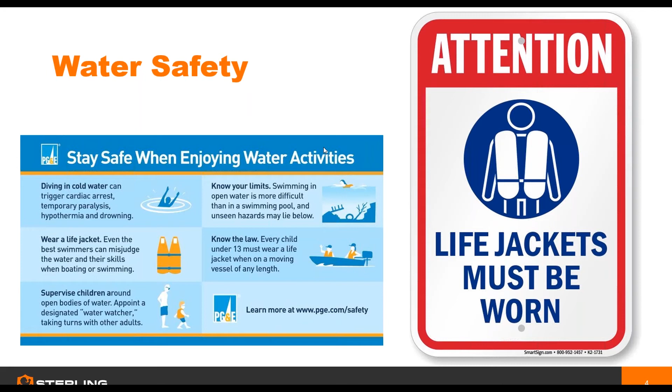So I've put a couple slides up here just to remind us that we're coming into that time of year—whether we have kids or grandkids, take water safety seriously. It can cause tragic events quickly that can change our entire life. I just want to put that reminder up before we get into the details of specifically working near water.

To talk about working on or near water, the first area of regulations and rules we need to consider is we should always have a life-saving skiff. With that, we should have a 30-inch life ring and 50 feet of suitable line. The only exception to this is if we can walk into the water and pull someone to safety without that need. Ring buoys also need 90 feet of line, with 200 feet spacing between them.

We're going to look at a lot of different scenarios today where we're working in moving water or standing water, but these are all things we need to consider. First aid or CPR is also something we need to have, combined with working with the buddy system—we should always have someone else with us when we're working around water—and then proper personal flotation devices.

When we talk specifically about engineered or non-engineered temporary water crossings, we should always inspect them before crossing. It's not only while we're building them, but we also need to consider the risks before we cross them and take ownership in monitoring and inspecting those crossings.

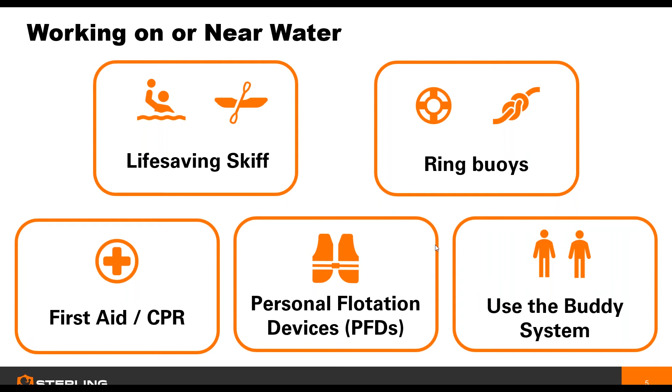So looking at the different scenarios we'll consider as we talk about bridging today, there's a lot of unique attributes to these different areas. Naturally, when we think of waterways, my mind goes to moving water, open water, creeks, rivers. But it actually spans a much wider range of things.

So, ditches—really a rapid grade change, or just an entry ditch—typically dry, with solid soil bearing. Then we get into wetlands. This is typically standing water or constant water. Naturally, you're going to have a different soil bearing, which brings in a lot of additional environmental considerations.

Underground utilities or infrastructure - we're showing a pipeline marker here, but that goes into ductwork, drain tile. Really what we're trying to avoid here is any type of compaction or compression of the soil that could damage those resources.

The last area is elevated obstructions. There's times out in the field where we're going to come up against an area that we just can't remove an obstruction, or it's not cost effective to do so. The example we have here is railroad tracks, and just making that smooth transition over, protecting the rails or whatever asset is crossing, by a type of bridging solution.

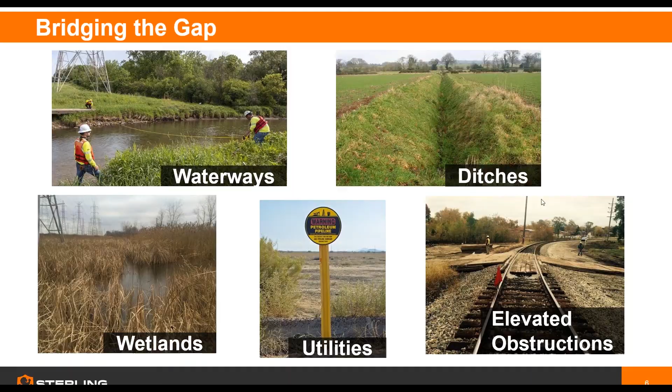What I really want to stress before we get into the different solutions is it's all about risk management. There's many risks associated with poor planning or lack of knowledge when we talk about selecting and constructing the right crossing. We're talking environmental, regulatory repercussions, potential loss of property, or even death. We really have to ask ourselves two questions right away: what's the potential impact of my decisions and actions, and what's the severity of the outcome possible?

There's a picture here of just an example of crossings - they are a risky part of the construction business in the field. There's a lot of things to consider, and there's just too many variables that can make things go wrong. This picture is a timber crossing that was the result of a flood event that came in quickly and unexpected. These timbers being pushed down the right-of-way naturally are going to cause potential backing up of water and many different issues that compound quickly. So we need to make sure that we're managing the risk and planning for it on the front end as we build our crossings.

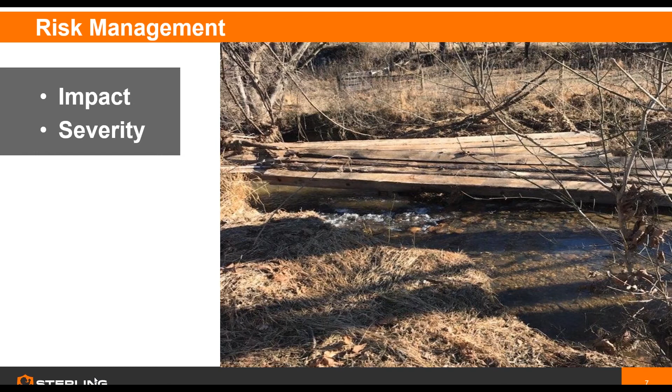Naturally, near and dear to my heart is field ingenuity. I started in the field and have come up that way, and I think it's important that we appreciate what the field can do. I think there's a lot of things that we do are more of an art than a science, but anytime that we can take that information and we can get ahead of it, we can plan for it, we can mitigate more of the risk.

So construction is naturally a fine balance between schedule, cost, and mitigating risk. All those things have to work together. So it's critical when we're setting up the job that we're preparing our guys in the field with clear direction and plans, clarity of the limitations and potential risk, and just giving them the proper tools and products for execution.

The guys in the field just want to get it done. That's what they're there for. They are very creative. They will find solutions with what they have, and it's critical we give them the right tools to be able to do that safely and stay within time and budget.

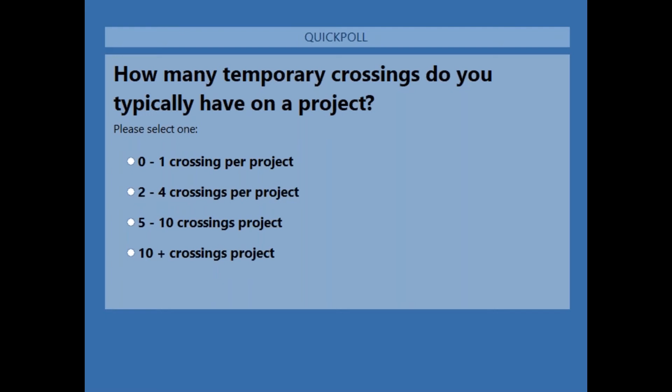Great, it looks like we have a lot of responses in here. Thank you for that. I appreciate the feedback - yeah, a lot of this comes down to how we define a crossing, right? Looks like the large percentage here you're seeing is really zero to four crossings on a project. It depends on the scope of the project, the size, the duration, and we'll talk through some of that and how the right product also fits that as we get into the details.

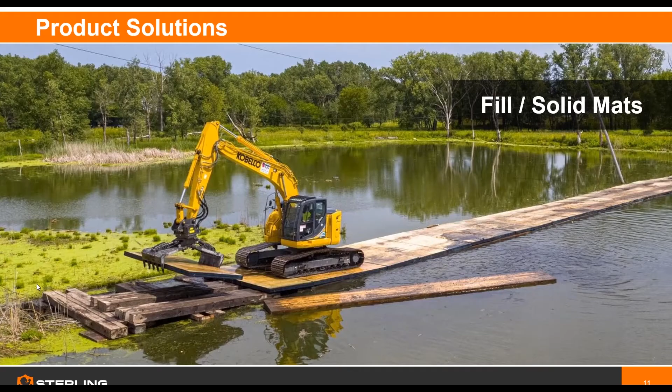So as we're understanding the product solutions, I just want to take a little time to talk about all the different options that are available out there. Some of these are non-engineered, some are engineered, and some are a combination of components of both.

In recent time, we have really seen a trend of increased requirements for engineered temporary crossings. I'm sure there'll be questions about where the future is going and what that looks like. So what I wanted to go through today is look at these different options, from what I would call the simplest to the most complex crossing.

Naturally our first option is solid matting or fill, if that's an option. It's very safe, but heavy on materials, with a lot of potential environmental impact. A lot of this depends on how much time it's going to be installed and if it needs to be removed after. This picture is an example of a wetland where solid matting made the most sense based on soil bearing and other factors we had to consider.

Next option would be culverts. Again, this is a very safe option, but it does bring a lot of environmental impact and things that have to be considered, whether water flow restrictions or permits. Again, it comes down to cost of material, how long it's going to be in, and what the requirements are there.

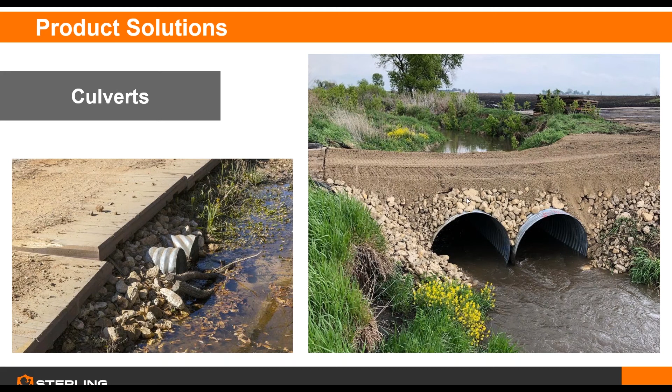Timber mats would be the next area. It's very common usage in the industry. Timber mats are not an engineered product. You can do some type of engineering calculations for specific lift plans or bridging scenarios as needed, but it's typically going to be based on wood grade and species, and it's a very conservative approach. It's hard to engineer the solution. This really is usually left to a level of comfort by the guys in the field and what's needed for layers, and that can definitely leave some room for error.

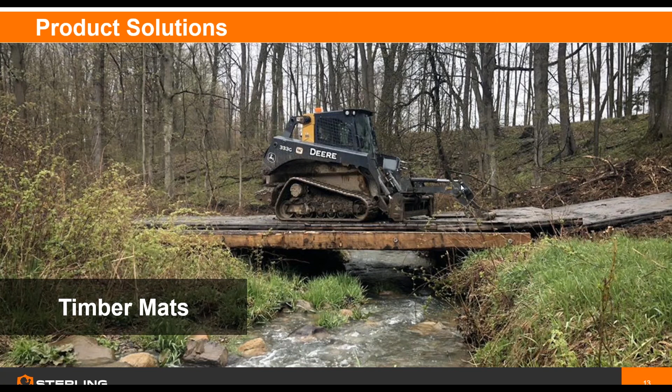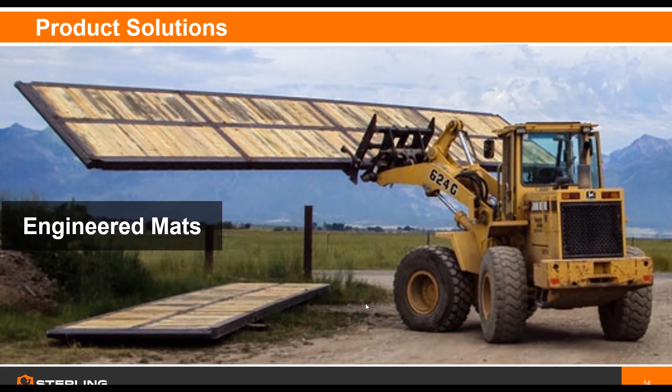Engineered mats would be the next one. You see multiple different products out there made of engineered components, whether it's steel incorporated into them or glued products, things like a CLT mat that has engineering specifications to it. Typically these have a limited capacity in what they can span, but they could be integrated with other products as well to put the engineering numbers to it to verify the safety.

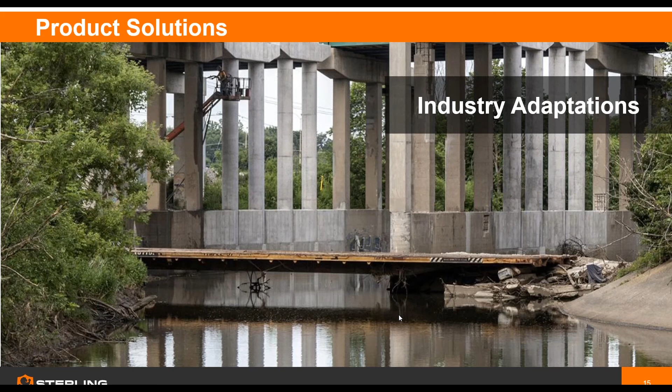Looking at this picture, what you're seeing here, this yellow line across the bottom, that's a rail car. So industry adaptations are also something we have to consider. Rail cars are a great example of that, where wheels are removed and they're used in the right of way for spanning. A lot of times these rail cars have additional gussets or supports added to them to hit the required span and load capacities, but that's another option that's out there.

We touched on it in the introduction a little bit. Modular engineered is another form, and our TerraCross fits into this well. It's all engineered components that are then assembled in the field, which makes for very versatile shipping, movement of pieces, and smaller equipment to assemble it, but it's a fully engineered solution.

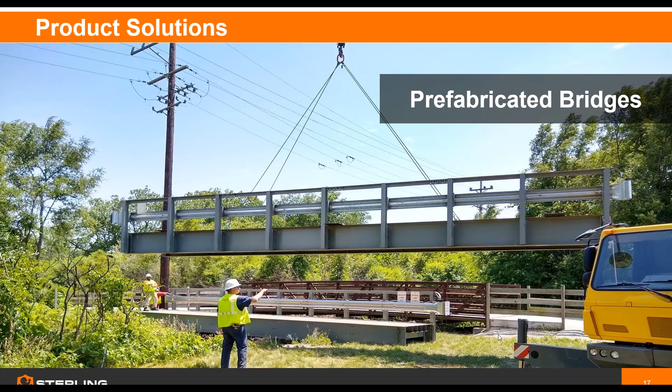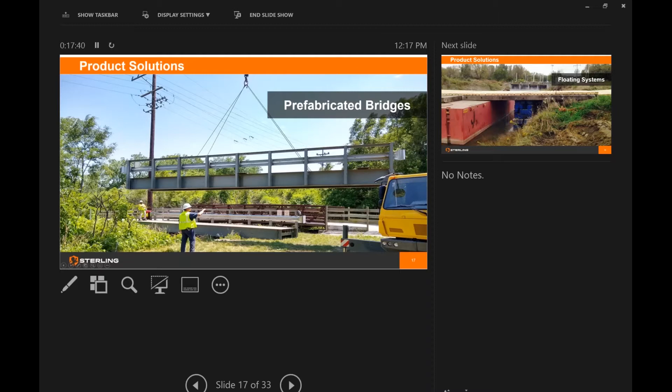And then the last section would be floating systems or barges. These are what I would consider your higher risk option, also requiring specialized equipment, but it really opens up the opportunities for difficult spans.

We're going to go into a second polling question now. Based on all of those different styles of solutions, the question here is, what percentage of your crossings required an engineered solution?

Great, thank you for that feedback. Levi, I'll share that poll with you. Again, thank you for the responses. Looking at this data, I think we're seeing a lower percentage, typically because we're talking about just volume of crossings—that's a natural response, I think—but as stated earlier, I think we're seeing a trend or a push toward a more engineered solution.

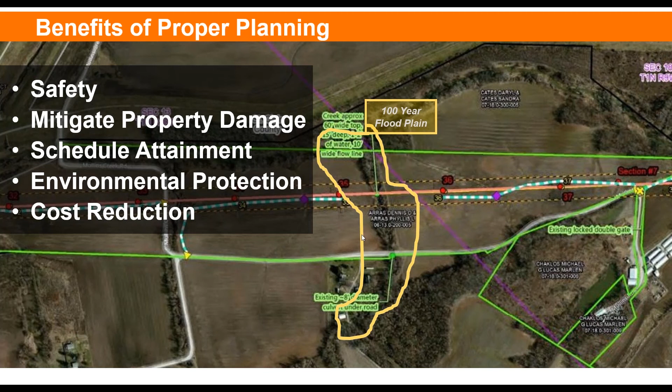Moving on to benefits of proper planning. We need to consider all these things as a result of proper planning: elevated safety, mitigated property damage, schedule attainment, environmental protection, and cost reduction. Naturally, when we plan ahead and all these things work together in harmony, that's when the project all comes together and the ultimate result is attained.

Project assessment, as we're planning for what bridge specifically to a project now, we're getting a little bit more into the details of how we decide on how we select the right solution.

The time frame is a key indicator. Will there be shifting of outside forces? Are we crossing over seasons? Will there be different weather events? Time frame is a big driver, especially on cost and budget, whether we can justify installing culverts instead—just different things we need to consider that are driven by time frame.

Number of crossings per project. Again, can I use the same crossing that's a modular style? Can I move it down the right of way? How does the schedule all work together? How versatile is the product? Frequency of use—how many times will it be crossed? Do I have to worry about shifting, stability? What kind of range of equipment will be going over that crossing?

Ownership and inspections is a big one. Who's going to take that ownership? Who's going to watch for shifting of it? Will there be different contractors on it or just one? What's my risk there? And then what's my planning window? How much time do I have to get the proper pieces in place? What am I looking at for product availability, freight, timing?

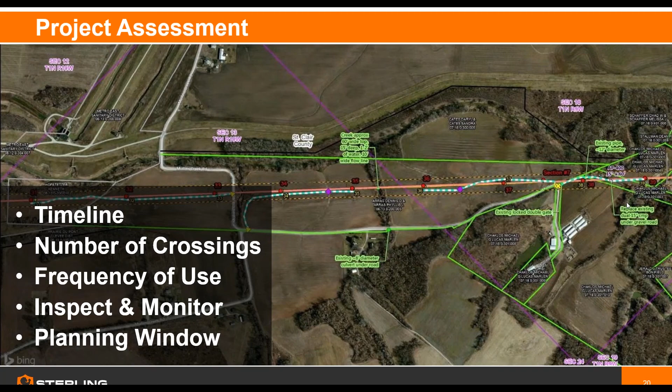Once we've looked at the project as a whole, then we need to look at job site evaluation specifically by location. A lot of these projects may have multiple crossings. Is one bridge allowed to be moved and used in multiple locations, or is it too specific by location? So things we need to consider: flexibility of location, do I have multiple crossing locations to compare?

Can I move it one way or the other within the right of way, maybe toward more stable banks or a narrower crossing? What's my accessibility into the site? Do I have defined haul routes, load limits bringing things in? What's my environmental impact, soil disturbance? What's my symmetry on each bank that I'm dealing with?

Weather expectations—is flooding possible? Am I in a floodplain? Proximity to the general public. What are the potential risks downstream with the type of crossing that I'm considering? My working area—are there overhead obstructions?

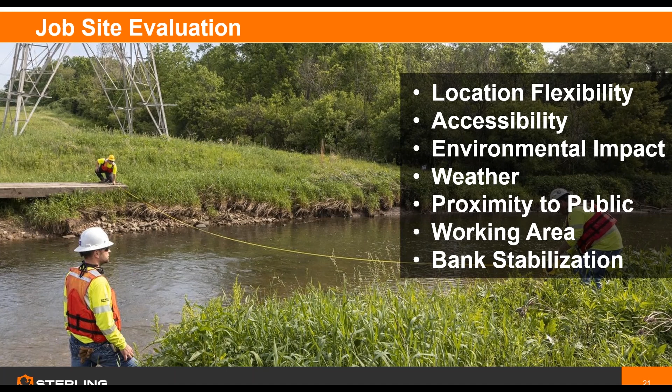What can my potential work pad look like? And then one of the big ones is bank stability and makeup. What kind of soil do I have? What kind of slope on the banks? Is it moving water? Is it undercutting on the bank? Do I have anything compromised there that I need to consider as well?

Once we've looked at all the job site evaluations—and really what builds up the strength of the unit we're going to choose—it's what does it need to hold? What's the forces from above? And that's equipment analysis. I think too many times we take the worst case scenario and figure that will cross over, but there are too many variations when we talk loading that we need to consider.

We need to look at multiple aspects. All these different pieces of equipment can act differently on the bridge, whether it's wheeled versus tracked, load distribution, vehicle length. Do we need to consider elevation changes? Are the axles too spread out that we can't get over it without the piece essentially bellying out? What's our travel path width? Are we loading in a place the bridge can handle? And just overall specifications—do these pieces of equipment have accessories, counterweights, different things that can be sent over the bridge separately? We need to understand the equipment before we select the right bridge.

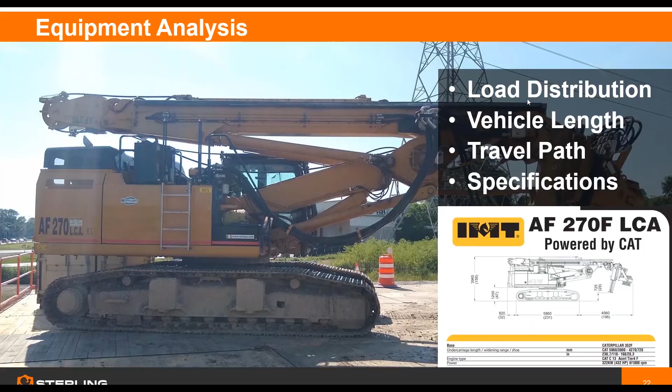Environmental considerations, another major driver that controls how we think about everything. Naturally, we should be picking the best solution environmentally as well, but from a time perspective of pulling permits, time of year, restrictions, regulatory restrictions by area—all those things we need to understand. And then what does the bridge allow for how I include control devices? Am I in a floodplain? This bridge here is the Terracross 40 that naturally will allow you to put geofabric incorporated right into the design.

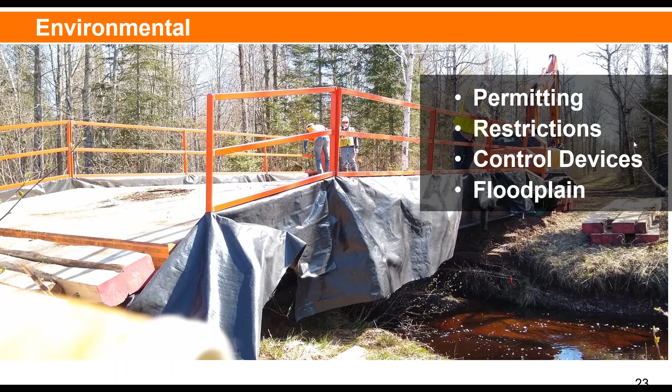Our first case study was a unique situation where we had a customer crossing in place that they used for hunting and some recreational things. The bridge was not in great quality, but the customer saw it as something that needed to be protected. We were looking at about a 25-foot water crossing. It was really the only place we could cross, so we needed to cross by elevating over the bridge with very minimal soil disturbance. An engineered product was required. There were 4 other crossings on the project that worked chronologically, so we figured with the right solution we could move it down the right of way and save on bringing multiple units in. It was critical that we did not leave any debris in the waterway.

External factors: narrow rural roads, accessible from the east side only, and the west bank was a little uneven, which made some tricks for minimal soil disturbance requirements.

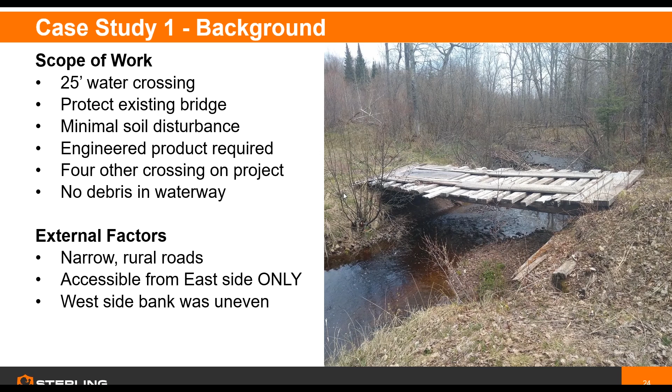So the right solution that was picked here, naturally narrowed down by being an engineered solution, but with the 25-foot clear span, the 40-foot terra cross allows for a 35. It also gave us the ability to shim up on both sides.

With the right equipment, we could set from one bank, as you're looking here. One load that was not overweight, not over width, was able to get into the tight locations. We were able to shuttle all those pieces down this logging road and put it in place for a one-day install.

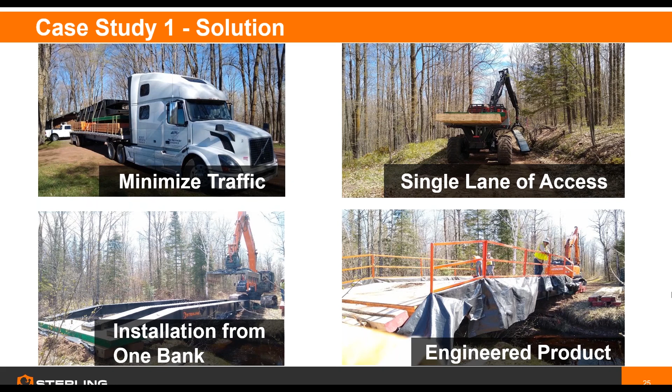The pieces, all being so modular, could quickly be picked up, loaded back out, and moved to the 4 other locations to hit their time schedule, only having to build one bridge into the budget.

The second case study we're going to look at was a little more difficult. This was an 80-foot water crossing in a high security facility. The goal was to safely transport a control house across the water. We were dealing with a low clearance delivery trailer, very gradual elevation changes, minimal deflection allowed, and we were looking at the potential of moving water and very deep banks.

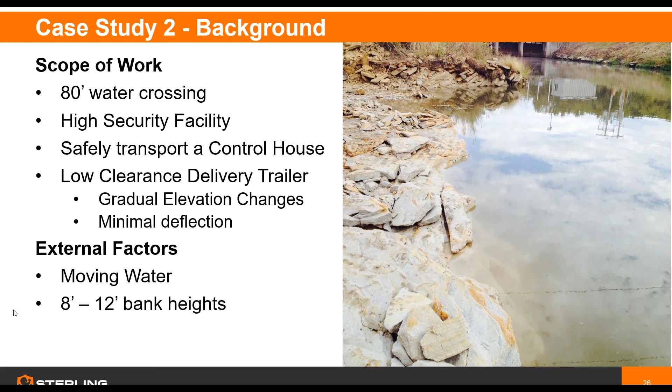So the solution was a combination of a couple different things. This was a barge system that was lowered down into the water to give us our buoyancy and the height we needed for the minimal elevation change. Some excavation and leveling was also required to meet that gradual change.

The barges were tied to some dead man anchors that were engineered and put into the banks to tie off. Then timber matting was used as a bridge across, tying in.

You'll see the bank stabilization required there with a stack of timbers, and also to minimize that span of the timber mat, to ensure it had the structural integrity to take that span across from one side to the other. So that's a pretty good example of a combination of engineered and non-engineered components to get us the right solution.

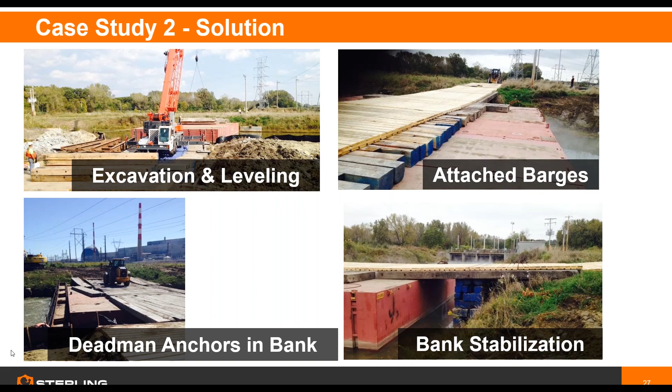So in summary, what we need to start with is put a plan together for success. Communication and knowledge is the key. We need to mitigate our risk by understanding all the potential impacts and act accordingly. If there's any way we can cut risk out of it, we need to.

Of course, we also understand there's no need to throw money away, and there are times non-engineered solutions are also adequate. That's where we need to assess all the available solutions and leverage our resources. I think by doing that, we can come to a right solution that is best for everyone.